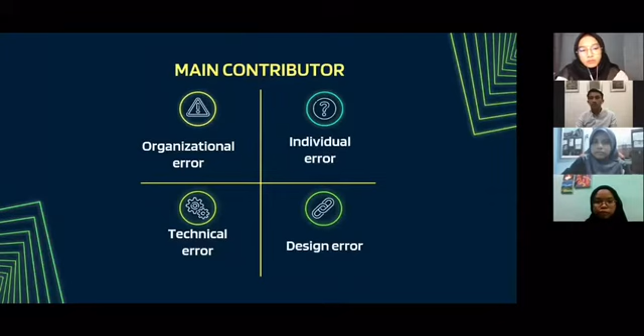Therefore, all accidents that occur may lead to damage of equipment, environment, and affect the health and welfare of employees on a large scale. Next, the problem statement.

Lack of understanding and information on what events can contribute to an accident may later result in similar accidents in the future. Second, for several years, many reports of accidental release of flammable liquids and gases, reactive substances, and toxic substances have been recorded in operations, causing injury. Next, the objective.

First, to study the accidents in a few types of chemical process industry within 1998 until 2018. For example, the study on accidents that occurred in petrochemical and refinery plants around the world within this period.

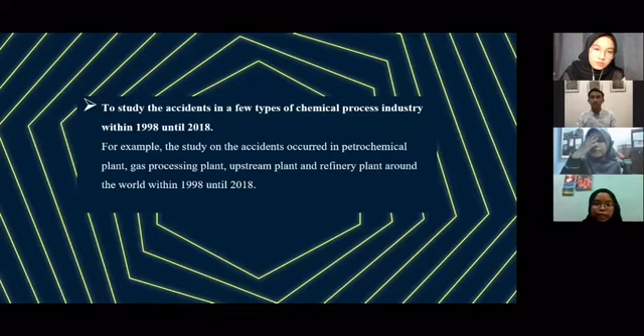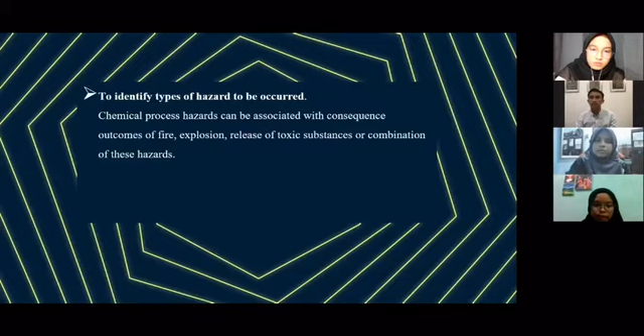Second, to identify the type of hazard that occurred. Chemical process hazards can be associated with consequence outcomes of fire, explosion, release of toxic substances, or a combination of all these hazards. Third, to identify, classify, and rank accident contributors and determine the origin of their root causes.

Root cause analysis is important in order to get the underlying cause of harm from the accidents that occurred. There are different types of root causes, whether caused by human contributors, such as organizational error or individual error, or equipment contributors, which are design equipment error or technical equipment error. If the root causes of an accident are not identified, only superficial solutions can be considered.

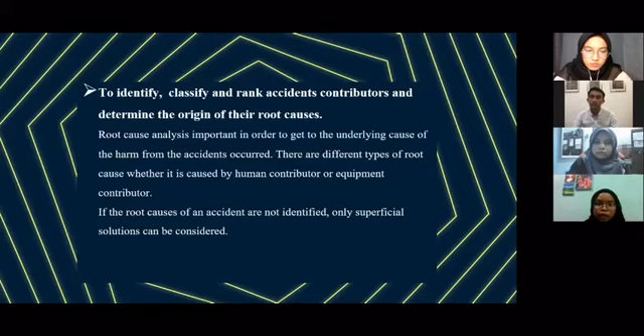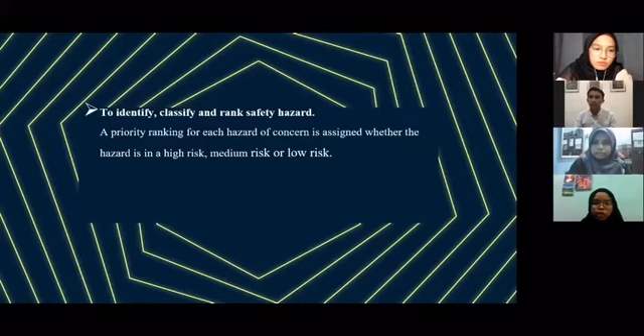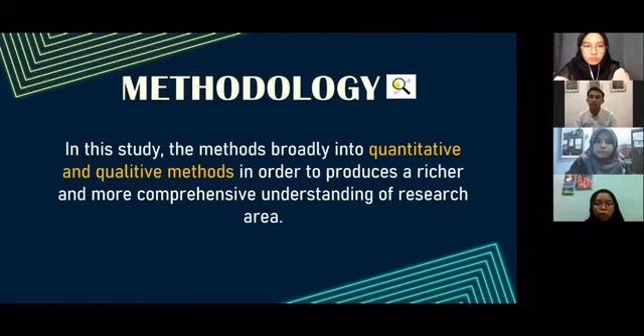Next we go to the methodology for our case study. In this study, the methods broadly fall into quantitative and qualitative methods in order to produce a richer and more comprehensive understanding of the research area. Then, the scope and limitation for our case study.

The components that we study are 7 factors, which are type of equipment, process, hazards, process condition, and other accident contributors that lead to catastrophic accidents in the chemical process industry mentioned earlier. We will discuss more about the accident contributors in the next slide.

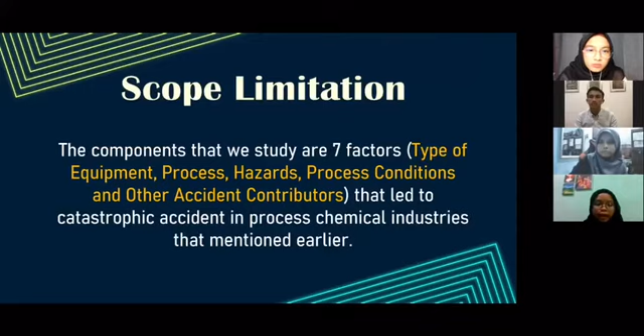First, when we collect all the journal or article for the accidents, we identify the type of hazard, then identify the type of equipment, identify the type of chemical involved in the accident, and then

identify the process condition involved, which are temperature and pressure, whether high or low, and then identify all the accident contributors such as human error, which are individual and organizational error, and equipment error, which are design and technical error. And then the last one is to recommend the safe or preventive measure in order to prevent similar accidents in future.

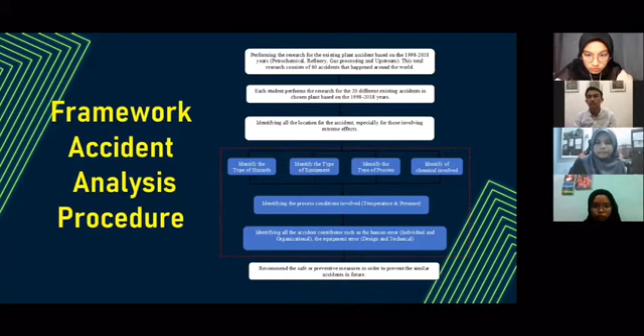Okay, next, the findings of our case study. First, type of equipment, type of process. Third, NFPA of chemical. Fourth, temperature. Fifth, pressure. Sixth, types of hazard, and seventh, accident contributor. So next.

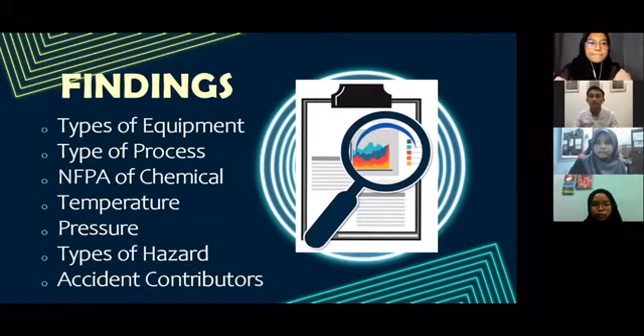So for the next slide is equipment involved in process chemical industry from 1998 till 2018. Next slide, please.

Based on the table analysis of 80 accidents, the results show that tanks have a higher possibility, around 21.51%, to occur accidents in chemical plants, followed by piping, reactor, and process vessel, compared to the other equipment. These are the common equipment that cause accidents in chemical plants.

So why is this happening? Most companies follow the standard and guidelines either in design, construction, and operation, but only certain companies actually do so. This is why tank accidents still occur in the first place in chemical plants.

And why is this happening? This is probably because of minor mistakes that lead to major accidents in tanks, such as a tiny hole that leads to liquid leaking from a tank and causes a big explosion. Some companies also do not follow the safety regulations from the local safety institution, especially during inspection and maintenance works, or no maintenance works or regular inspections are done at all.

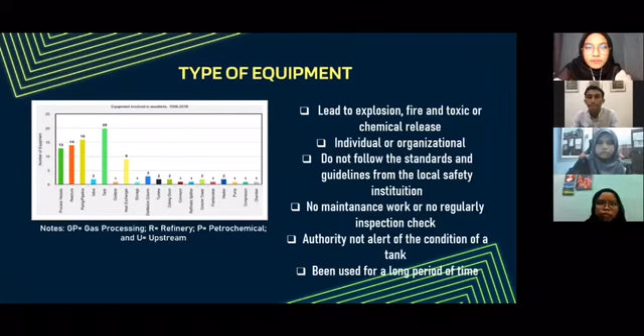Also, we can see that the authority doesn't care about the condition of the tank, or the tank has been used for a long period of time. So next slide.

For instance, the accident at Partridge-Raleigh Smith County oilfield on June 5, 2006, where 4 workers were installing a pipe within 2 tanks, and their welding sparks ignited flammable vapor escaping from an open pipe about 4 feet from their welding activity, causing an explosion at the tank and killing 3 people who were standing on top of the tank, with the 4th seriously injured due to the explosion.

Next example is from the MGPI processing accident in Kansas on October 21, 2016, about 4 years ago, where a truck driver wrongly connected a pipe containing sulfuric acid to sodium hypochlorite, producing a cloud containing chlorine and other compounds.

So why didn't they want to repair or fix this? Because this company actually disobeyed the safety order, since they knew that the safety regulation during maintenance works or operation would cost them a lot. Although they made so much money from the production, they still didn't want to spend their money to repair or fix the broken parts in the tank.

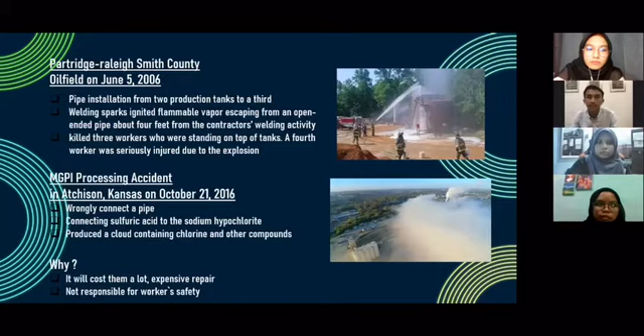Okay, next is process in chemical industry from 1998 till 2018. So next.

So there are lots of processes happening in chemical plants. Most of the accidents that happen in chemical plants occur when the chemical substance is being handled or processed. From the results, mixing process is the most recorded process involved in incidents in chemical plants, around 13.58%. This is probably because of incautious action or behavior by the operator during controlling the flowing liquid, causing the liquid to mix with the wrong substance, or wrongly connecting a pipe and causing an accident in the plant.

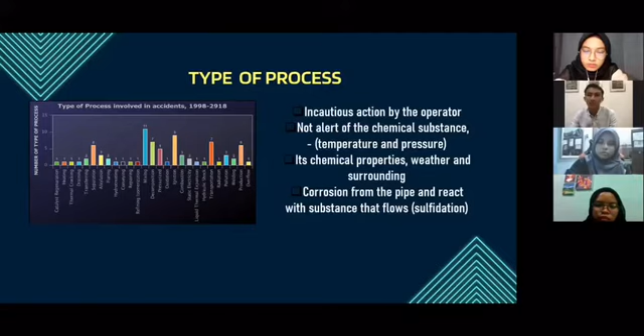Like the example I used before, in MGPI, where an accident on 21 October 2016, a truck driver wrongly connected a pipe and caused a cloud vapor. And next slide.

Next slide is corrosion from the pipe reacting with the substance that flows into it. On the previous slide, I picked one example from the Chevron Richmond accident in California on July 6, 2012, where a rupture of the 4-sidecut piping resulted from a component being extremely thin due to a damage mechanism known as sulfidation corrosion, also known as sulfidic corrosion. It's the damage mechanism that causes thinning in iron-containing material such as steel, due to the reaction between sulfur compounds and iron at temperatures ranging from 450 to 1000 Fahrenheit.

The leaking pipe from the accident was identified to be a portion of the 4-sidecut piping. The engineer concluded that the leak was not significant enough to require a shutdown, so they immediately repaired it. Unfortunately it worsened, and white hydrocarbon vapor visibly began to emerge.

The last one is chemical properties, weather and surrounding, like on the previous slide. I picked one example from the Praxair facility accident on June 24, 2005, where St. Louis was experiencing a heat wave with bright sunlight and a temperature around 97 Fahrenheit, where cylinders suddenly exploded and spread fire across the area.

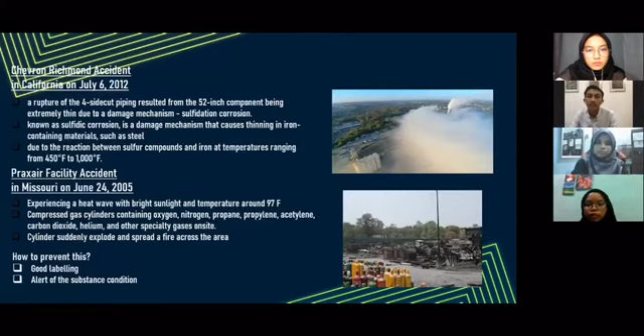Most of the accident would have been avoided if good engineering had been practiced, such as good labeling, and operators should be more alert about the content of each equipment in the plant.

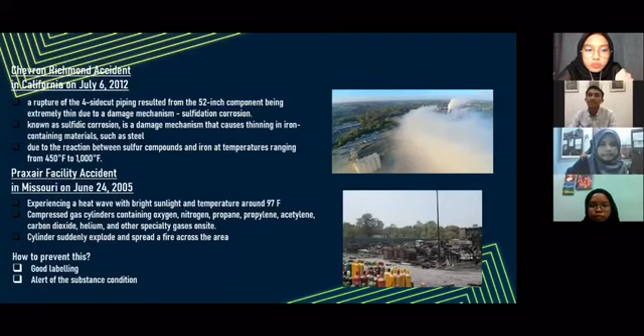I will continue the presentation. I will talk about the NFPA of chemicals. NFPA stands for the National Fire Protection Association.

As you can see, this is a visual of the diamond, how NFPA looks like. There are 4 types of hazard: first, health hazard; second, fire or flammability hazard; third, stability or reactivity hazard; and specific hazard. This study will focus on the health hazard, fire or flammability hazard, and instability or reactivity hazard.

In order to handle certain risks, industry has recently revised tools in the form of guidelines issued by NFPA.

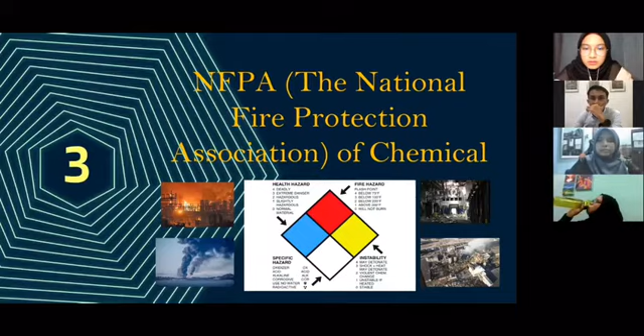In the 80 accidents that we have studied in the process chemical industry, the chemical most frequently involved in chemical accidents was methane. The total NFPA of methane is 6, with a health rating of 2 and a flammability rating of 4. In upstream plants, 5 accidents involved methane, refinery had 2 accidents, and gas processing had 1 accident.

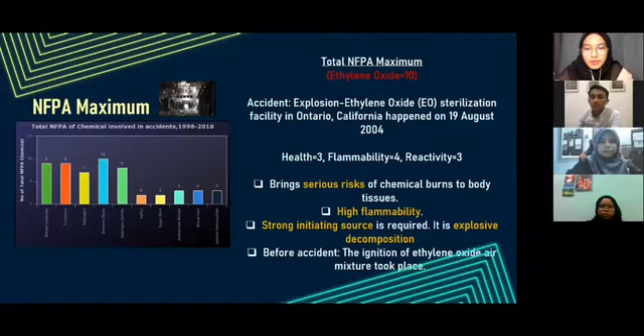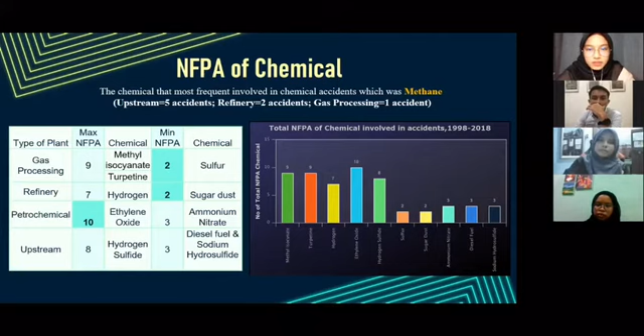The NFPA maximum belongs to ethylene oxide. The example accident that involved ethylene oxide is Ontario, California, which happened on 19 August 2004. The explosion happened in an ethylene oxide sterilization facility. The ethylene oxide used in the facility is to kill microbes by disrupting life-sustaining molecules.

The health rating for ethylene oxide is 3, flammability 4, reactivity 3. The health rating brings serious risk of chemical burns to body tissues. If a device such as a medical product sterilized with ethylene oxide is not aerated - which is an aeration cycle after the sterilization cycle to allow the ethylene oxide absorbed during the cycle to elute from the medical product - then this medical product will contact with people and bring serious risk.

Second, high flammability. Ethylene oxide poses an exposure hazard as it easily and completely vaporizes at natural ambient temperature and atmospheric pressure, so a strong initiating source is required. It is explosive decomposition; the ethylene oxide will decompose when the temperature reaches 932 degrees Fahrenheit.

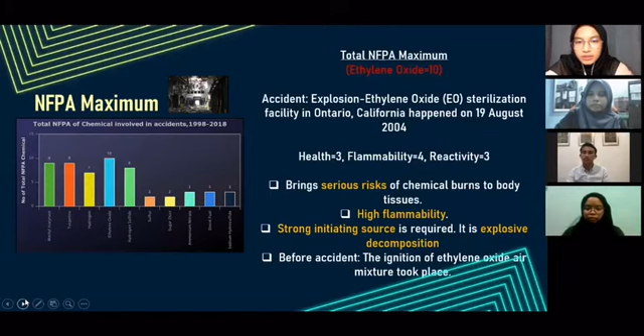The effect from the explosion: workers may be at risk of death or serious injury if safe operating procedures are not established and followed in large-scale industrial processes that use ethylene oxide gas for sterilizing medical devices and other products.

How to prevent this kind of accident involving ethylene oxide: regular preventive maintenance. Second, ethylene oxide concentration in the sterilization chamber should be monitored before back vents are activated, exhausting ethylene oxide in the chamber to the emission control device. It can be concluded that monitoring is needed to avoid exhausting high concentration ethylene oxide.

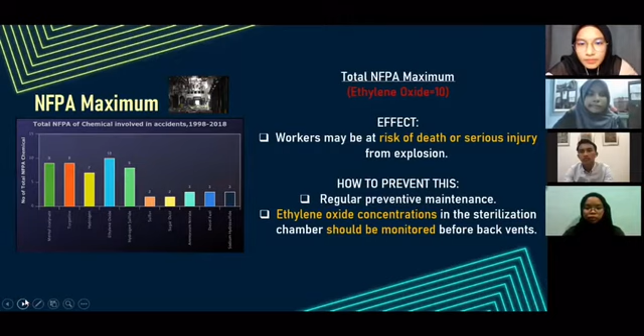As I mentioned before, NFPA minimum can have two types of chemicals that involve the same value, which are sulfur and sugar dust. For this slide, I will talk about sulfur first.

For the hazard rating of sulfur: flammability 1, and reactivity 0. The accident that involved sulfur is the Chevron refinery incident on August 6, 2012, where a fire hazard happened. The dust particles may be irritating to the eyes, nose, throat, skin, and molten sulfur can cause thermal burns. Sulfur may be ignited by friction, static electricity, heat, sparks, or flames. Toxic gases will form upon combustion; for example, burning sulfur can produce sulfur dioxide, which we know is toxic.

Why did this accident happen? Because Chevron did not effectively implement internal recommendations for the pipeline in order to prevent pipeline failure due to sulfidation corrosion. How to prevent this? The operator needs to examine potential corrosion and use the safest possible construction materials.

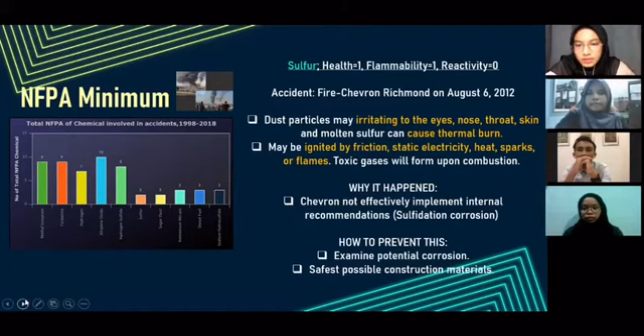The last one is sugar dust: health rating 0, flammability 1, and reactivity 1. The example accident that involved sugar dust occurred in Georgia on February 7, 2008. When sugar dust is in a dry or dusty form, it poses a combustion threat. Second, sugar dust mixed with air together in a confined space can form a catastrophic explosion.

How to prevent this? Housekeeping measures and strict maintenance practices are needed in preventing combustible liquid, compressed gases, and dozens of other unstable and reactive materials from initiating a disaster.

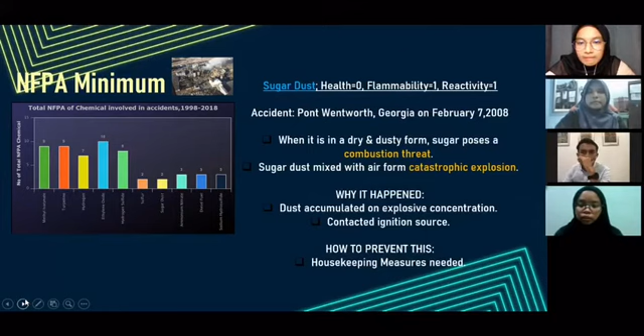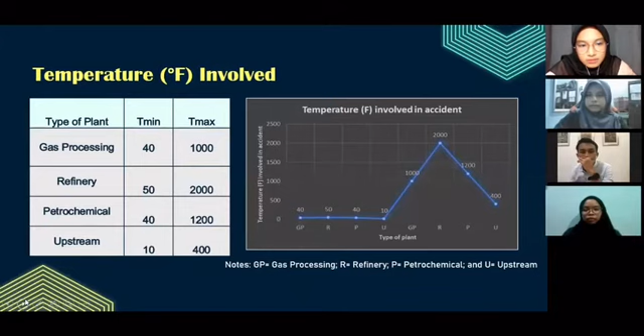On the left hand side, you can see high and low temperatures, but this is not a problem because from our study, either low or high temperature in the process chemical industry plant can still cause accidents that damage buildings, harm the environment, cause injuries, and cause death. Most accidents in the process chemical industry are caused by runaway reactions due to plugging and safety device failure, leading to explosion, fire, and toxic release. Operators should be more alert with temperature because it can change anytime and is hard to control. At high temperature, particles can collide more often and with more energy, which makes the reaction take place more quickly, and it can be classified as a runaway reaction.

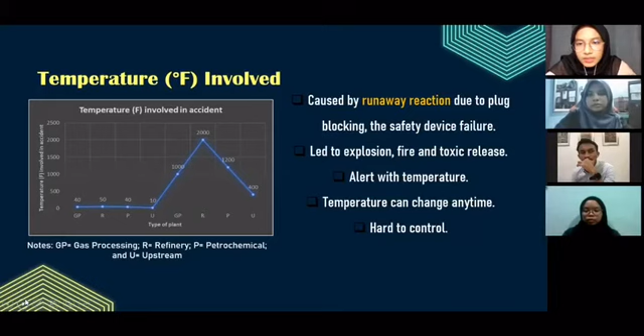For this slide, I will explain the temperature maximum and minimum for processes in the process chemical industry. First, temperature maximum is 2000 degrees Fahrenheit. The example accident involving this temperature is in Washington State, USA, on June 10, 1999. The accident happened due to a pressure relief valve failure and rupture of the pipeline, leaking gasoline exposed to high temperature. Before discovering the source of ignition and catching fire, gasoline from the pipe flowed down the creek for about 90 minutes, spilling 237,000 gallons, with a strong odor of gasoline, before the gasoline vapor exploded.

For the temperature minimum: 10 degrees Fahrenheit. The example accident involving this temperature is in the Gulf of Mexico in 2015, where a fire happened. The accident happened due to corrosion of a small bore pipeline. As you can see, both types of accidents I just mentioned are due to pipeline failure. In order to prevent this, the company needs to improve inspection and prevention practices.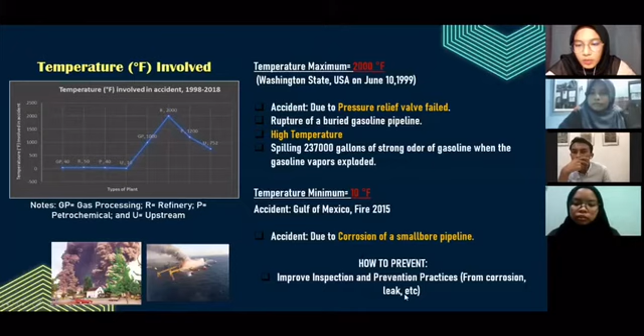Okay. So next is pressure involved in process chemical industry from 1998 till 2018.

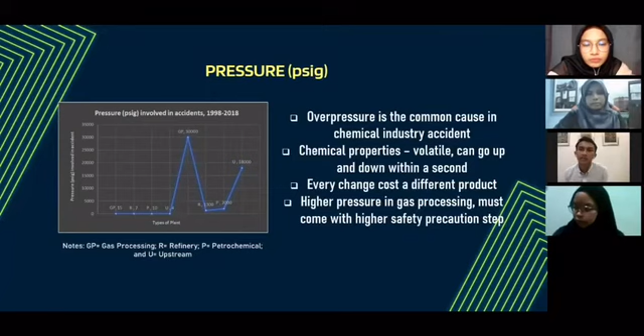According to the table, the most accidents that happen in chemical plants are because the highest pressure is recorded in gas processing plants, which is 30,000 psig, followed by upstream at 18,000 psig, petrochemical at 2,000 psig, and refinery at 1,300 psig. So most accidents in chemical plants are because of overpressure in equipment, leading to explosion, toxic release, and other hazards.

Operators should be more alert about the condition of the chemical composition, especially pressure, because pressure is very fragile and volatile to handle. It can easily go up and down within a second, and every little change in pressure can cause a different product. So the higher the pressure in gas processing, the greater the safety precautions need to be taken.

On the next slide is an example I picked from the NDK Crystal accident in December 7, 2009, where a vessel number 2 under an operating pressure of 29,000 psig suddenly and violently ruptured, going up to 30,000 psig. White clouds of steam and debris rapidly expanded outward from the facility and traveled onto the interstate, dissipating within a second, causing one death and one injury due to flying fragments propelled by the force of the vessel explosion.

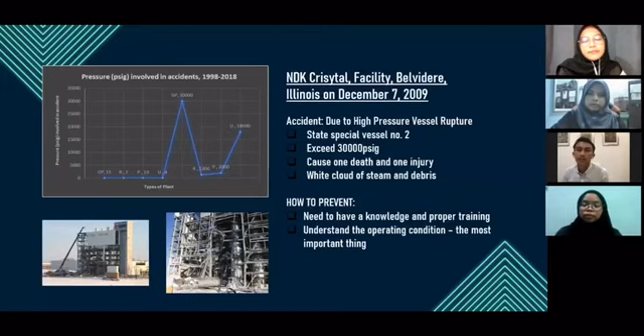So how to prevent this? First, the operator needs to have knowledge and proper training, because necessary training must be given to those responsible for repairing, maintaining, installing, or checking the pressure of the equipment at all times. We cannot afford to let a person with little knowledge about the equipment handle it.

Second, the operator must understand the operating condition, and this is actually the most important thing regarding pressure, because they should have a proper understanding of the gases or liquid contained in the pressure vessel—whether it's toxic or flammable. Once they know the content, they also need to know the operating conditions, including temperature and pressure, because pressure may exceed the limit and cause an accident, destruction to the building and facility, and even death.

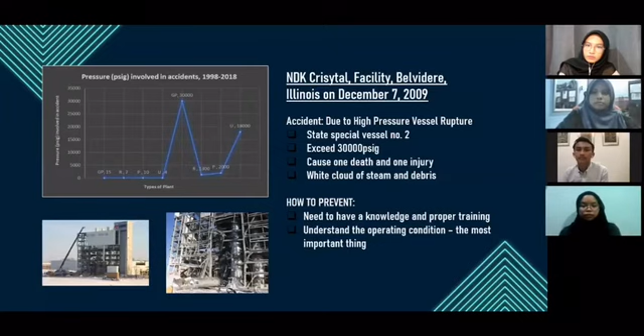Okay, next. So for the hazard involved in process chemical industry.

According to the pie chart, explosion is the most common hazard involved in accidents in chemical plants, at around 40% compared to other hazards, followed by fire, toxic release, and blowout. The least values are from mechanical failure and chemical release, about 0.93%. Hurricane, leak, and collision share the same value of 1.87%.

There are actually three main elements that combine to create a plant explosion: heat, the creation of gas, and a dangerous reaction. In order for an explosion to occur, chemicals must generate large amounts of gas within a short amount of time.

Often the chemicals involved in explosions become explosive when they come into contact with oxygen in the air. When a chemical produces large amounts of gas in a short time frame, even those that are not generally explosive can generate an explosion. The most common factors are heat and dangerous reactions, which cause many plant explosions.

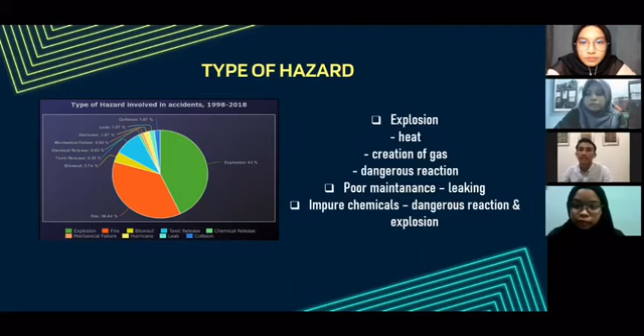So for example, I pick an example from the Goodyear heat exchanger in Houston, Texas on June 11, 2008, where the accident was caused by the heat exchanger rupturing and exploding.

It began with the operator closing the block valve, isolating the ammonia control pressure valve. Then suddenly the pressure in the heat exchanger shell started climbing until it violently ruptured.

The catastrophic rupture threw debris that struck and killed one Goodyear employee walking through the area. The rupture also released ammonia, exposing five nearby workers to the chemical.

And one additional worker was injured while exiting the area. So why do we need to overcome this? First of all, because our main priority is to save life - the worker's life, especially for those working inside the plant, and all the life surrounding the area, including people and the environment.

The second reason is to ensure that it won't ignite or cause other equipment to explode. The last one is to keep supplying product for the customer, as well as to look after the company's reputation.

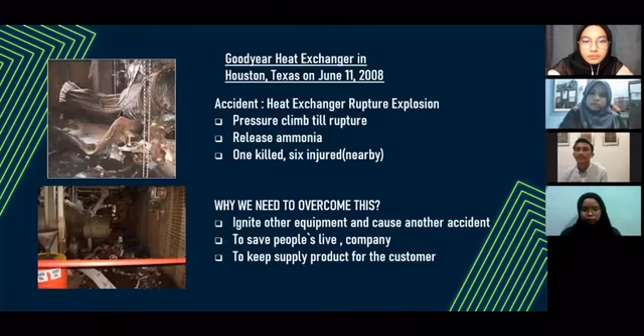The last factor that we have studied is accident contributors involved in the process chemical industry from 1998 to 2018.

The left-hand side shows more details on the total for each area of each plant that we have studied. Accident contributors are technically oriented, including human error and equipment error that lead to accidents. These two types of error are further divided into specific categories: human error divides into individual error and organizational error, and equipment error divides into design equipment error and technical equipment error.

In the 80 accidents that we have studied in the process chemical industry, 180 causes of accidents were found. Typically, there are also more than one cause that leads to an accident.

On the right-hand side are more details on the percentage of each error we studied. I will classify it: individual error contributes 21.11%, organizational error 27.22%, design equipment error 24.44%, and technical equipment error contributes 27.22%.

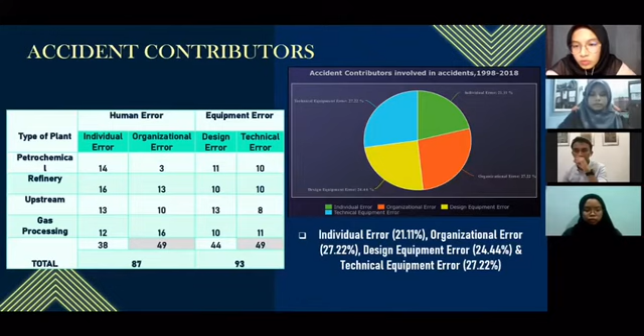The most common causes were caused by equipment error, which accounts for 93 causes, and equipment error has a high percentage compared to others.

First, no preventive maintenance, and second, no inspection of equipment. From these two issues, probably companies did not want to spend more money on maintenance because they think the maintenance costs are so high and it can curb the profit margin and prevent the company from success.

But actually this is not the right decision, because we know that if equipment fails, it can cost more than the maintenance cost. This is because the breakdown causes production to stop, and the costs are very high because no parts are being produced.

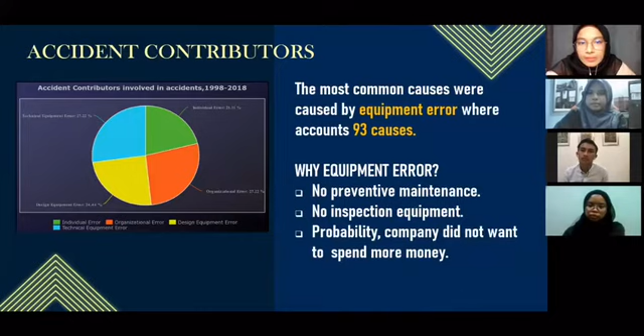The high causes within equipment error belong to technical error, which accounts for 49 causes and contributes 27.22%. This kind of technical error may happen during the manufacturing processes.

Examples of technical error include improper control systems, safety device failures, or system failure. This is because of no regular maintenance checks.

Chemical injuries caused by technical error should not be ignored, because if it happens, it may damage the building and injure people surrounding it. For example, if the cooling system in a reactor fails and at the same time the backup cooling system also fails and is not operational, it can lead to a runaway reaction where the temperature rises rapidly.

As we know, the reactor involves reaction and high temperature. After the temperature rises and there is no cooling system to prevent this runaway reaction, of course the reactor will explode as the greatest consequence.

An example of an accident caused by technical error is in Washington State, USA, in June 1999, due to the pressure control valve and the isolation valve not being operational.

How do we prevent this? Individual reactive processes need their own hazard recognition in order to evaluate an effective prevention and mitigation framework that affects both process design and equipment decisions.

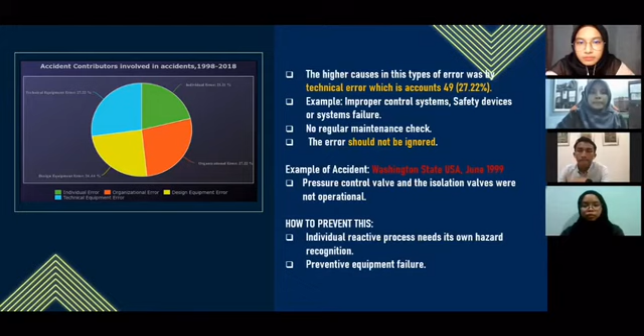For the last one is organizational error, which has a high percentage from individual error, accounting for 49 causes and contributing 27.22%. Examples of organizational error include lack of work permit, lack of awareness of hazard or knowledge in chemical reactivity, improper analysis of hazard, lack of attention, simple error, inadequate training, and lack of control of change procedure.

As we know, human error is very hard to control. An example of an accident caused by organizational error happened in Ontario, California, in August 2004. This was because technicians bypassed the time-consuming gas washes, believing there was no product in the chamber. They did not realize that about half of the ethylene oxide originally injected still remained in the chamber.

How to prevent this? Perform job safety analysis, operational procedure, and safety training to ensure compliance in chemical plants, in order to prevent chemical accidents caused by human error during repair, maintenance, and normal operation. That's all for the factors that we have studied.

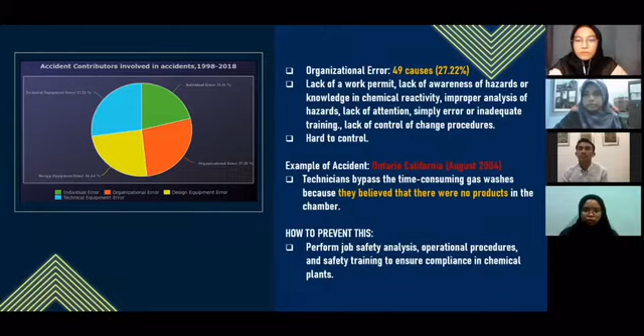For the conclusion, this case study performed an analysis on a catastrophic hazardous chemical accident involving a domino effect, focusing mainly on its process, condition, consequences, causes, and accident contributors.

Second, this research gives a good lesson, such as knowledge about process safety analysis in accidents. This is because a well-managed accident database with a sufficient number of meaningful accident contributors provides a multitude of information and resources for addressing hazards. There were accidents in the chemical industry, consisting of 7 factors observed, that can contribute to accidents.

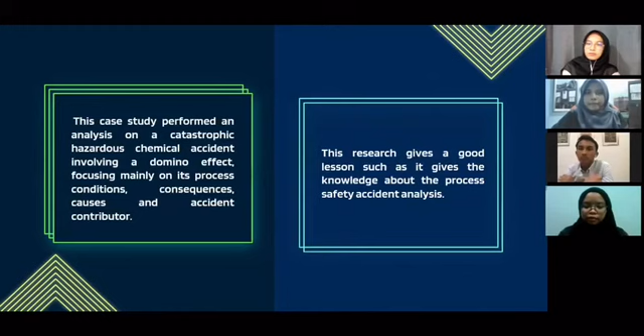Based on the analysis of 80 process chemical industry accidents, the results show that tanks have a higher possibility, at 21.51%, to have an accident occur in a process chemical plant, while explosion accounts for 43% of accidents. So accident contributors are divided into 2: first, human error, and second, equipment error.

For human error, it is more related to organizational error, which is 27.22%, and for equipment error, it is more related to technical error, which is 27.22%. Based on the result, it can be concluded that routine safety precautions are key.

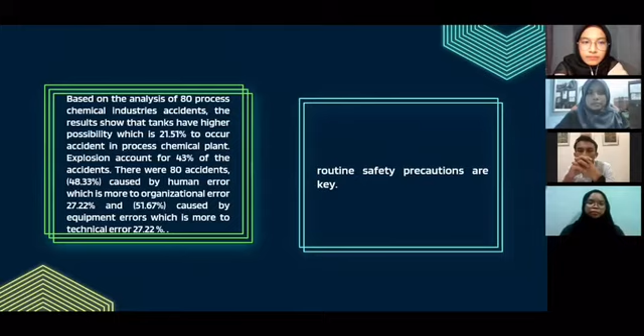So next, there were 3 safety or preventive measures in order to prevent similar accidents. First...

Manufacturers should be proactive in order to evaluate potentially dangerous products. In order to determine safe storage conditions, monitoring for real condition and elevated temperatures during storage should be carried out.

Second, hazardous chemical storage facilities should establish standard operating procedures for storing and handling materials that address storage restrictions. Last, installations that store, use, treat, produce, or transport hazardous materials should create and enforce a system to assess the possible hazard of changes to installations, facilities, chemicals, technologies, and processes.

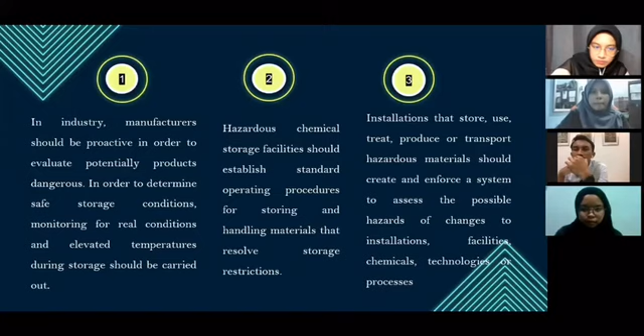Other than using safety and preventive measures to reduce accidents, companies can also follow chemical safety legislation in Malaysia to avoid accidents, such as the 4 safety legislations.

First, OSHA Control of Major Industrial Hazard Regulation 1996. The function is to prevent major accidents and to limit the consequences to people and the environment.

Second is OSHA Use and Standard of Exposure of Chemical Hazardous to Health Regulation 2000. The function is to control exposure of chemicals hazardous to health for workers at the workplace.

Third is Notification of Accident, Dangerous Occurrence, Occupational Poisoning, and Disease Regulation 2004. The function is to notify, report, and keep records of work-related accidents, dangerous occurrences, occupational poisoning, and occupational diseases that occurred at the place of work.